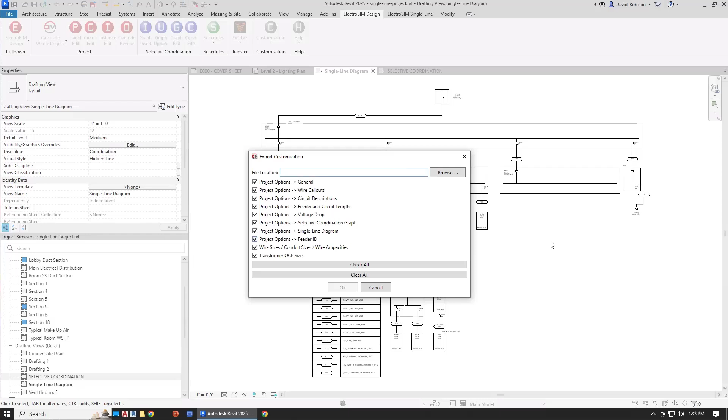When you run this, you have choices for what you are actually exporting and where you're exporting it to. So you give it a file location, and then choose what you want to export, the various option settings, and then also some wire sizing and transformer settings. And you can save that to a file. And then in future projects, you run the customization import command. So you take that file that you've exported, and then you import it into other projects. So that's just two different ways: you can do the template, or you can do the export import.

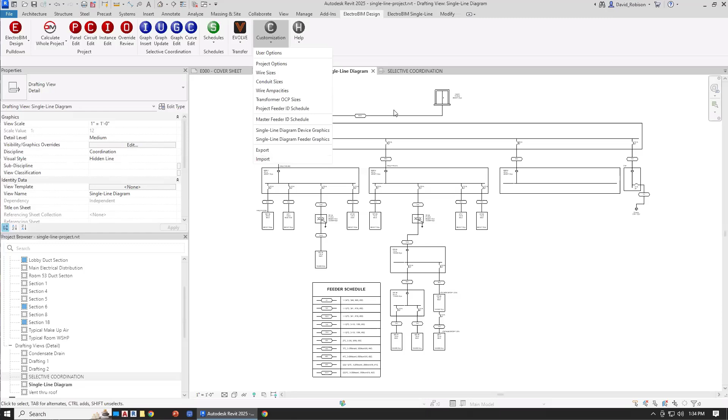One benefit to the export import is that you can then pull that into projects that have already started. Otherwise, if you use the template, you have to make sure to start with that template. And then once the project started, there's no way to update it. So the export import gets around that limitation with the templates. So if you have a template, you can set that up. There's probably a place for everyone to be using export import as well.

Let's look at the wire callout options. These options talk about how the wire callouts that we use for feeders and branch circuits are formatted. The first two control how we handle neutral wires. So display neutral wire count separately from phase wire count, and then conduit location, where that conduit shows up. So this just changes the format a little bit. So the default values are to do the neutral wire separate from the phase wire, and the conduit is at the front of the wire callout.

So if we run our panel edit command and we take a look at our callout, you can see that it has the conduit at the front, and then it has the phase wire and the neutral wire separate. So that's our default. So we can change that to collapse the phase and the neutral wires together if they are the same, and also move that callout to the end. So we'll make that change. So we're going to display the neutral wire together with the phase wire. We're going to do the conduit at the end of the wire callout.

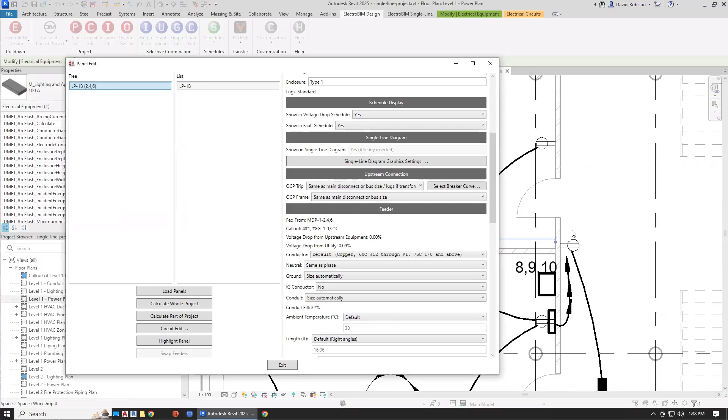Now, if we look at this wire callout here, you can see that the conduit size is at the end. So that's just a preference as to where you like that to be. You'll also notice that we have 4 #1s rather than 3 #1s and a #1 neutral. Since those wires are all the same size, we put them together as a single wire size. When you are combining the neutrals with the phase wires, if you go with a double neutral, you'll then end up with 5 wires. So now we have 5 1/0. It changed to 1/0 because we derated, because we have more current carrying conductors.

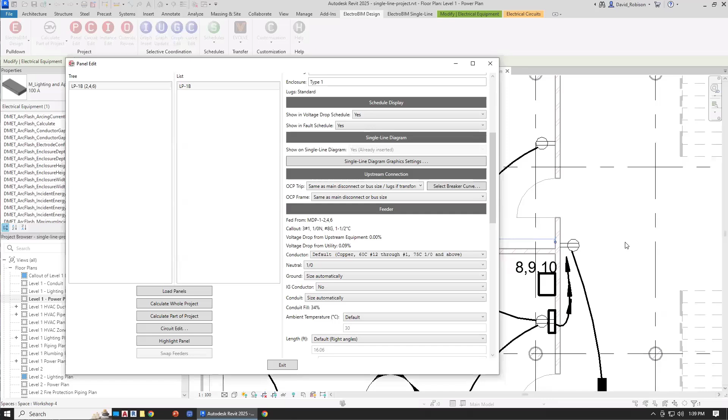And if we change the neutral from double to something different from that #1, say we want the neutral to be a 1/0, but we want the phase wires to stay as #1, now it is going to separate them because we're calling them out as different sizes. So we have to separate them at that point. So we combine them if we can. If they are different, we are going to separate them.

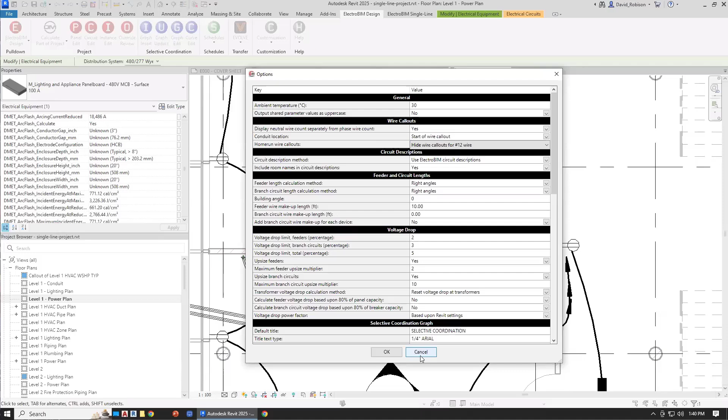The other option in wire callouts is the home run wire callout, how we want that to be displayed. There are 3 options here. We can display all our wire callouts, we can hide the wire callouts for #12 wire, and we can hide the wire callouts for #12 wire on single pole circuits. And what this is doing is it's controlling a wire callout home run shared parameter. That is set on your circuits themselves.

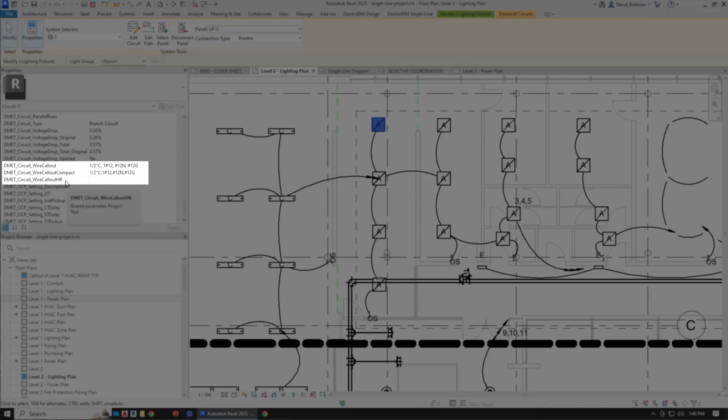So if I go to our lighting plan and I select this device, and then I go take a look at the circuit, it has a number of shared parameters that ElectroBIM puts on it. And you can see that we have the wire callout for that circuit. We have a compact wire callout, which removes the spaces. And then we also have this wire callout HR. And so this is the wire callout that we're intending that you could put on your home runs, that this option is going to control.

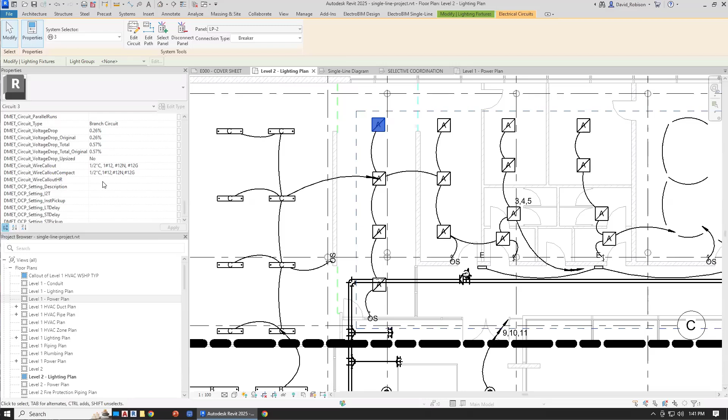Because a lot of times you don't want to display the wire callout for every single home run in your project. You've got a lot of home runs that are #12s, and so a lot of times people just leave those off. And the assumption is if it's not labeled, it must be #12 wire. So that's what this option is allowing you to do. Since this is a #12 wire, we're not going to show the home run callout. So it's going to be blank. So you could use this as a parameter for a tag for the home run, and then it's going to be blank.

The other option is we can show it and only hide it for single pole circuits. So for a lighting circuit like this, a single pole, it's not going to show up. If it was a 3-pole circuit, an equipment connection that was #12 wire, we would still show 3 #12 in that case. So that's the difference between these two. And then the top one here, display wire callout, we're just going to show the wire callout on all our home runs. It essentially becomes the same thing as the wire callout at that point, so there's no difference between the HR and the other one. So that gives you control over your wire callouts for your home runs if you don't want to show it for #12 wire.